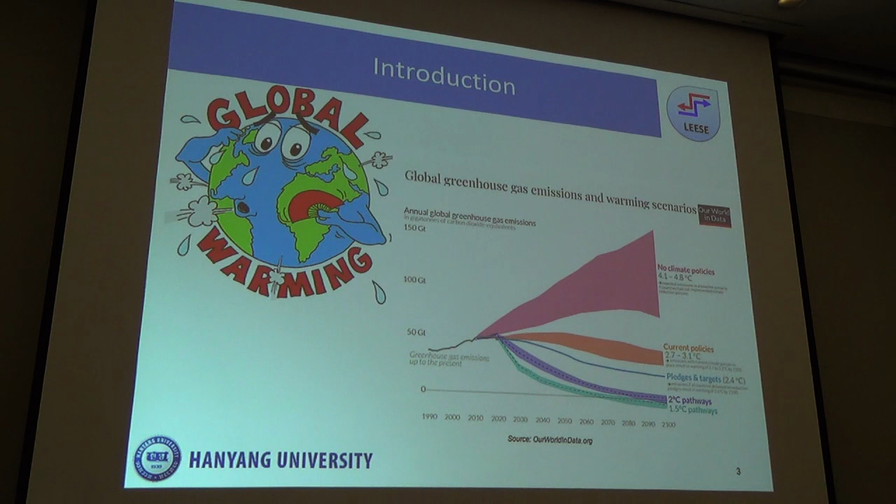However, if you look at the current policies' implementation, it's not in that good a scenario that it could control the CO2 emissions in a controlled way. So in the Paris Agreement, economies agreed to set the net zero CO2 emissions goal. But in the current scenario, the CO2 emissions are increasing so significantly that it is not expected that this goal of net zero CO2 emissions will be achieved if revolutionary efforts are not made.

So in this case, hydrogen is the most attractive fuel because hydrogen can be used as an alternative at any position. Like we can use it in the transportation sector, in the industrial sector, everywhere. So that's why hydrogen is probably the most attractive alternative fuel and the clean fuel.

And most of the hydrogen is produced using the established commercial technology, that is the reforming process. And more particularly, steam methane reforming process is the well-established commercial technology to produce hydrogen. However, the issue is that besides this hydrogen production, this process gives us a lot of carbon dioxide emissions.

So we have to tackle this problem by integrating a good CO2 capturing process. And these days, many researchers are trying to implement or develop a good process of CO2 capture to integrate with the already established SMR-based hydrogen production technology.

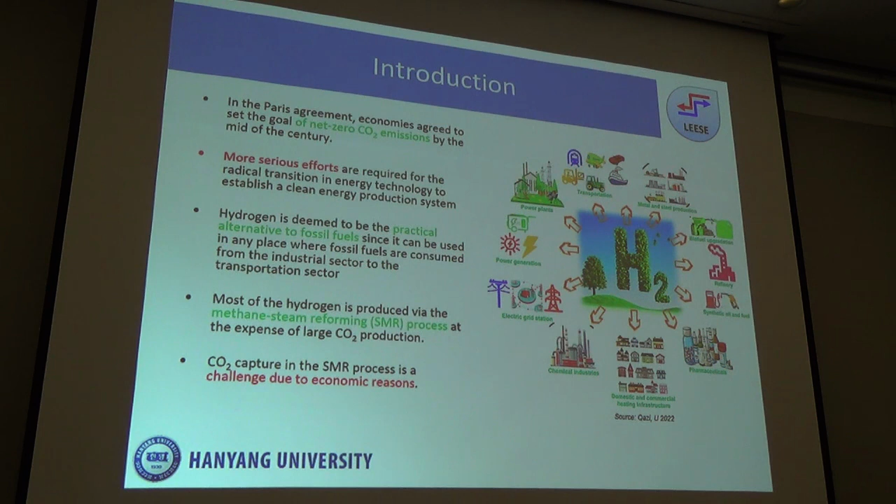Here we can see the schematic diagram for the SMR-based hydrogen production process. And we can see that basically the feed gas and the fuel go into the reformer where it converts into the syngas, and in the next step the carbon monoxide is further converted into carbon dioxide, and then it passes to the pressure swing adsorption, that is PSA, to remove the hydrogen.

And then here we can see we have multiple streams available to capture CO2. The first stream, location 1 as shown here, is the flue gas. This flue gas contains almost all the CO2 produced in the process. And the next location is the PSA inlet, that is the feed to the PSA. It contains CO2 of around 16%.

And there is another stream available, that is location 3. It's the PSA tail gas, which contains around 50% of CO2. So there are 3 locations. We can capture CO2 in any of the locations, and there are pros and cons for each location.

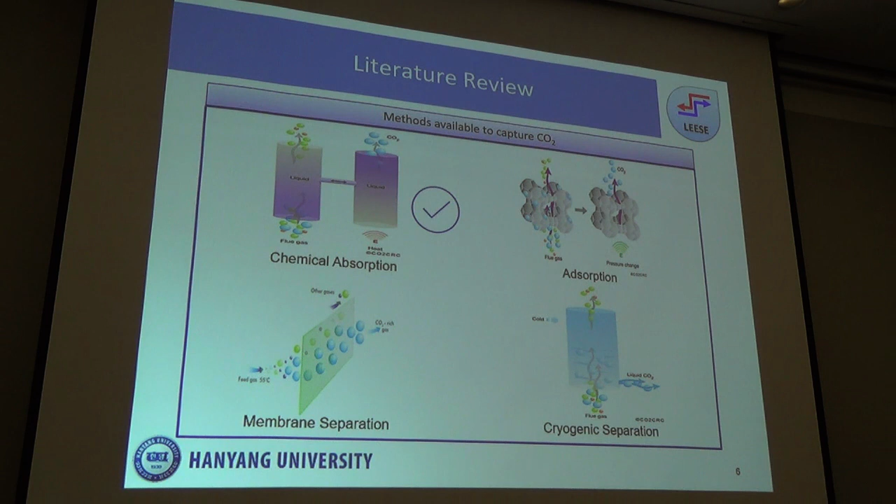But if we compare with membrane separation technology, generally membrane is very attractive because it's very easy to implement and it's not that expensive, but membrane technology is facing the issue of selectivity. So regarding selectivity and capacity, chemical absorption is still the most attractive technology, although it's expensive.

Now here is the brief literature review. Many researchers have made efforts on the analysis, model development and economic analysis of the CO2 capture process, particularly using absorption techniques and amine solvents for the SMR-based hydrogen production system.

Here are a few researchers shown, and we can see that most of them target capturing CO2 in the PSA tail gas stream, that is the PSA feed gas stream, using MDEA solvent or MDEA with some promoter. Basically, why did they do it? The reason is that the PSA feed stream is attractive because of the high partial pressures. So using the high partial pressure, they can capture the CO2 in an economical way.

But there is the PSA tail gas stream. This stream basically contains high CO2 concentrations, so it is also attractive. But it is not much attended by researchers. For example, I've shown you one study. In this study, MDEA solvent has been implemented to capture CO2 from the PSA tail gas stream, and different process configurations have been tested for the optimal solution with minimum regeneration energy of the solvent.

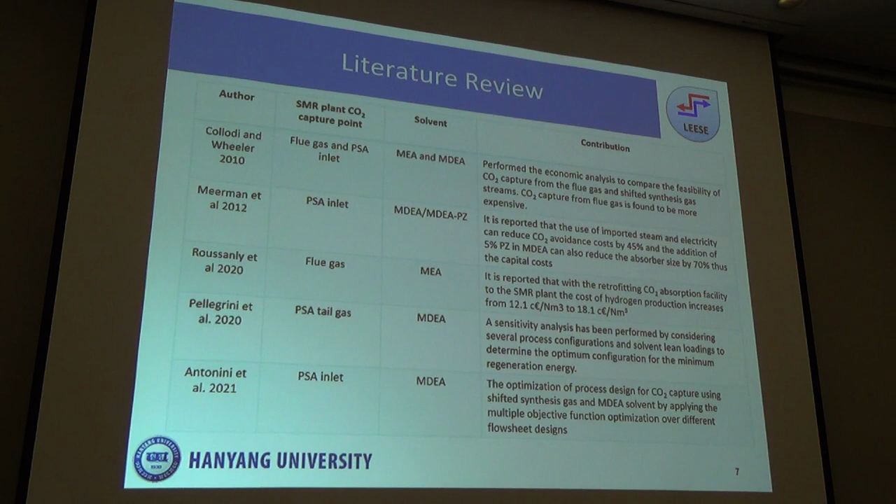So this is the conclusion of the literature review: most studies focus on the PSA feed stream to capture CO2, and there are not many studies on PSA tail gas. To manage the economy in the case of the PSA tail gas stream, the key is the operating pressure, because this stream is available with high CO2 concentration but at low pressure. So we have to increase the pressure to absorb the CO2 in the amine solvent. Generally it is operated at higher pressure, and we need a compressor to compress the gas.

And the study I mentioned is at constant pressure conditions. So to get good economy, it is mandatory to find the optimal pressure conditions for the PSA tail gas stream.

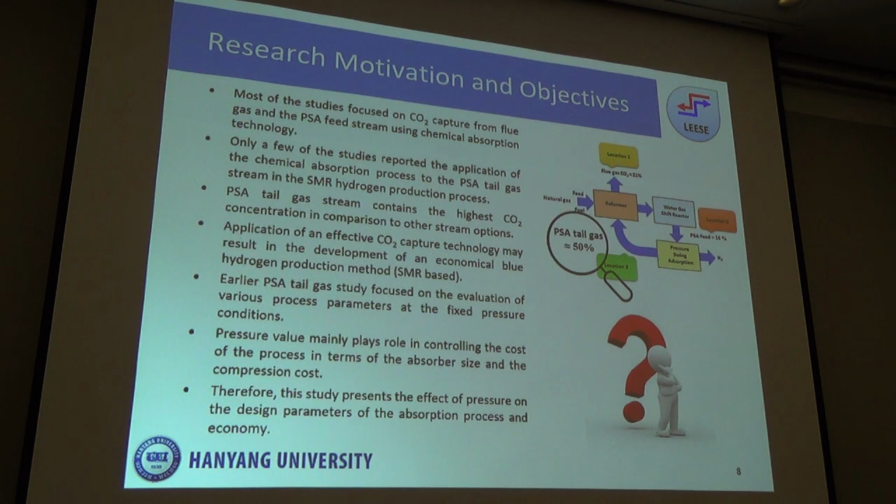In the methodology, to simulate the absorption process, we have implemented the rate-based model. Our earlier published model is implemented to simulate the absorption process for PSA tail gas processing. Here we can see the basic equations of the material and energy balance, and these are the interfacial mass transfer expressions. The CO2 equilibrium concentration is determined using the Kent-Eisenberg model, and the enhancement factor that defines the rate of reaction kinetics is estimated using the Wellek correlation.

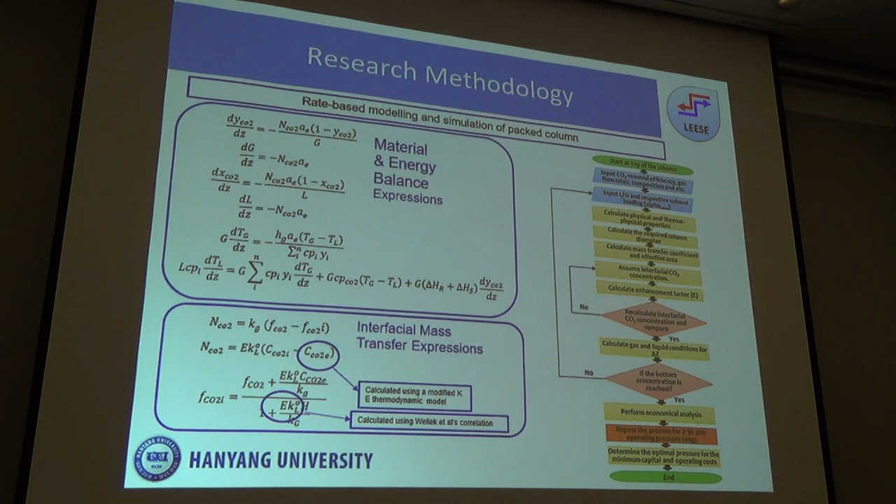This flow describes the computational procedure of the rate-based model. At the beginning, the calculation begins at the top of the column, and finally this calculation is repeated for 2 to 10 bar operating pressure for the PSA tail gas stream to determine the optimal pressure conditions.

This shows the schematic diagram for the economic analysis. In our study, we initially restricted the economic analysis to the absorber only. We determined the capital cost and operating cost. For the capital cost, we use the absorber column, the pump and the compressor. Similarly, for the operating cost, we use the electricity consumption cost of the compressor and the pump.

So it shows the schematic here. We can see how the absorber cost is estimated step by step, like the calculation of the absorber vessel, then the packing, installation cost, and other factors.

And then similarly the pump cost and the compressor cost are estimated. And finally the electricity costs are estimated using the unit cost of the electricity, and then the compression cost is calculated using the electricity consumption of the compressor.

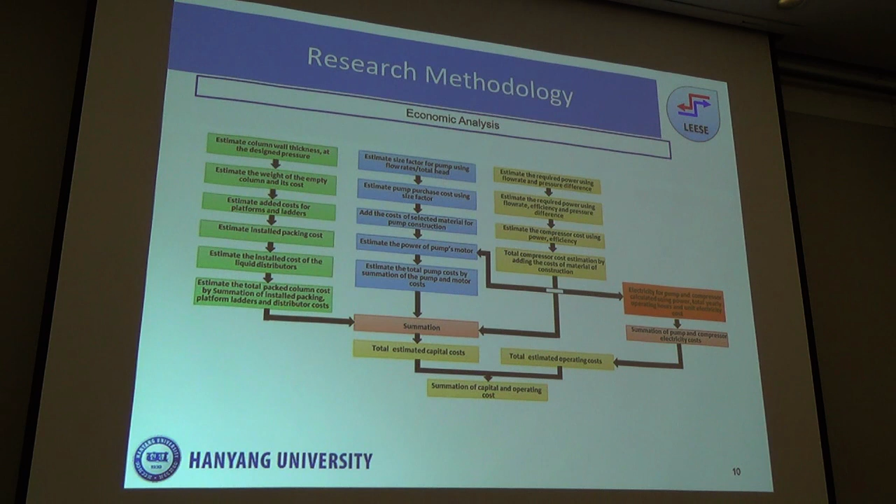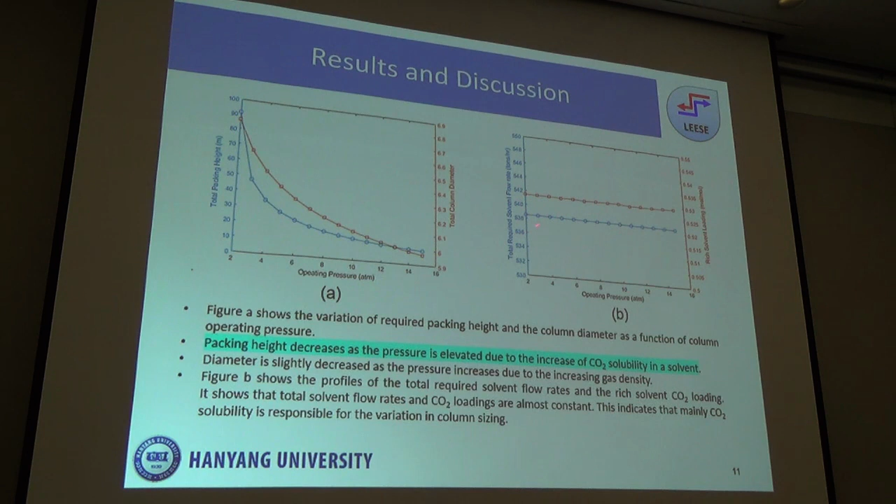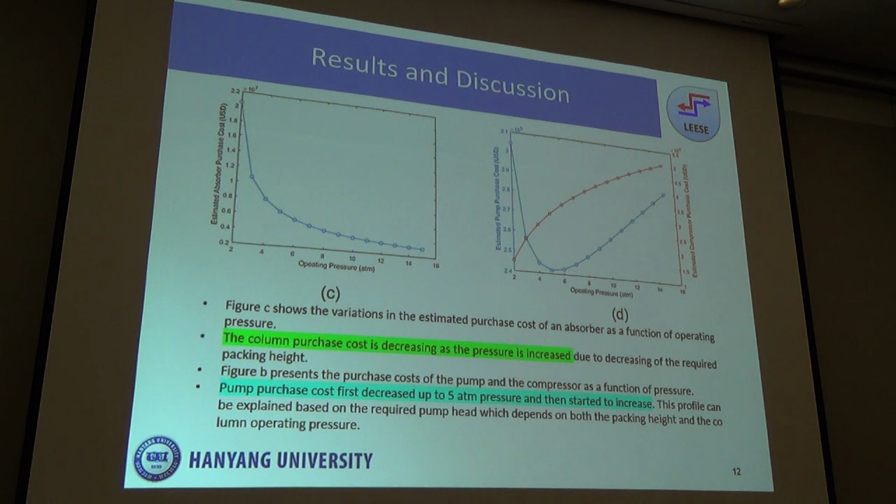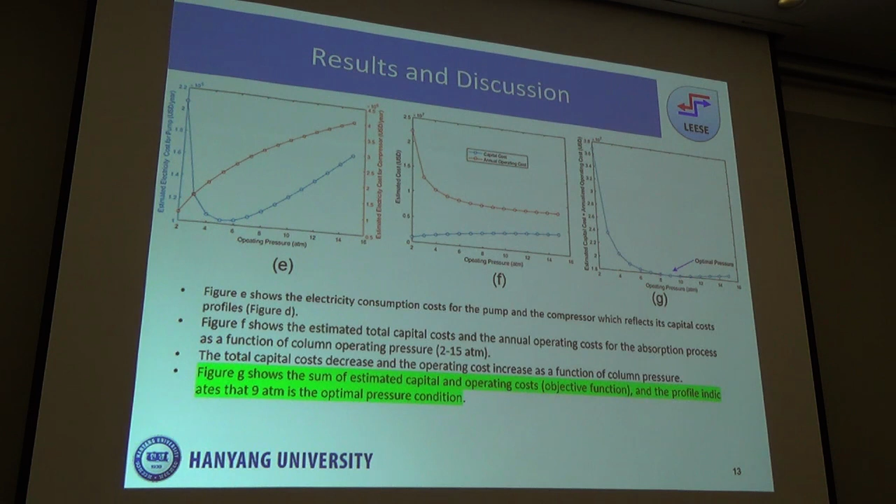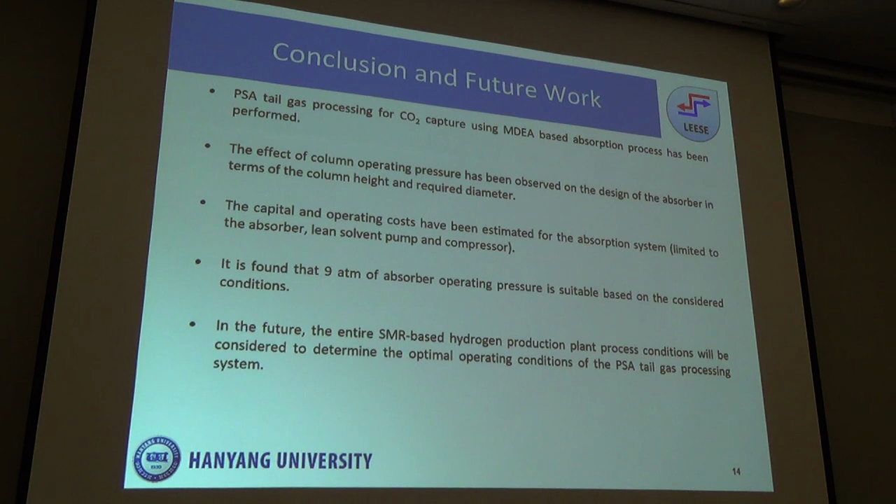We see that it is decreasing, and finally it's the minimum at this 9 atm pressure, and then it started increasing. So this is the optimal pressure we can use to process the PSA tail gas stream to capture carbon dioxide using the MDEA solvent. So the PSA tail gas stream can be used to capture CO2 using the optimal pressure conditions. And in our future work, we will consider the whole process to analyze the economy of the process.